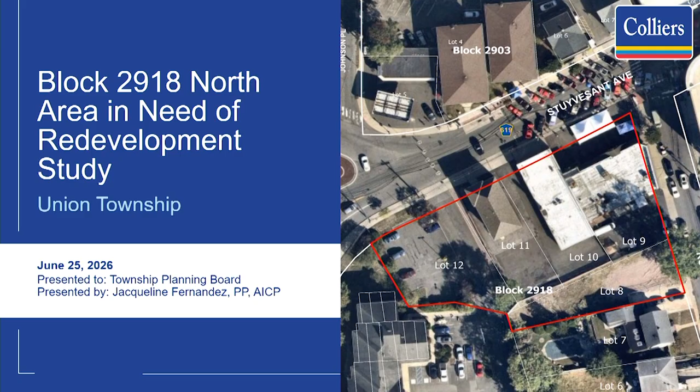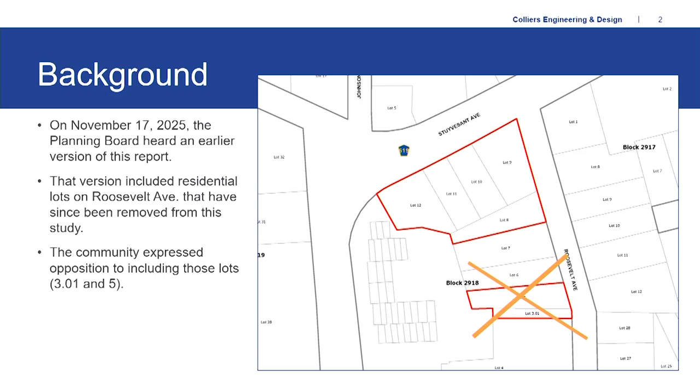This may sound repetitive since this has been before the board in 2025, an earlier version which included 2 residential lots along Roosevelt Avenue. Through community input and deliberation, the governing body has decided to remove those 2 parcels to reduce the study area to 5 total lots with an area of just under 1 acre.

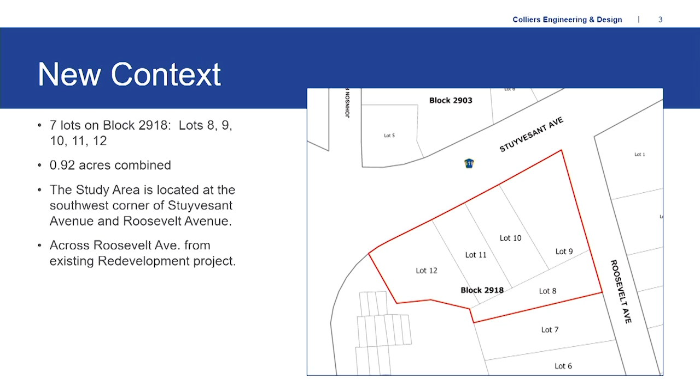We reanalyzed these parcels. They continue to meet the criteria under the Local Redevelopment and Housing Law. This is just going to be a little refresher for the recollection of the board. Essentially, these parcels are within the downtown core and downtown transition zones.

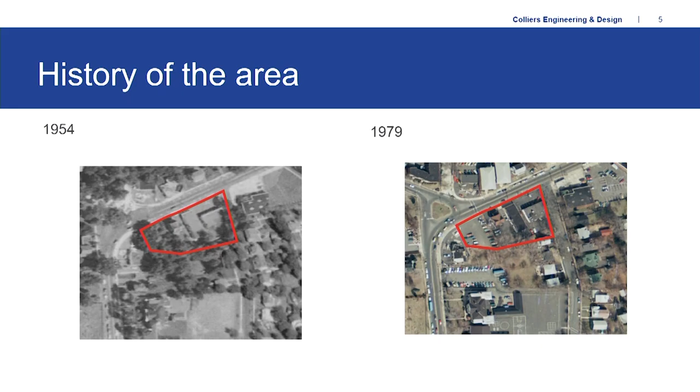A brief history: they've been developed since 1954. A few of the historical imagery shows development all the way up until 2025, which shows the existing present conditions that exist today.

Now, the purpose of this study is to determine whether or not these parcels, under the criteria listed in the Local Redevelopment and Housing Law, meet the criteria to determine if the parcels are an area in need of redevelopment. The criteria used, meaning all these parcels meet 1 or more of these criteria, are as follows: Criteria B, which is the discontinuance of a non-residential building for at least 2 consecutive years, or it has been allowed to fall into a state of disrepair.

Criteria D, in which areas or buildings by reason of dilapidation, obsolete layout, or faulty arrangement and design are a detriment to the safety, health, morals, or welfare of the community. And finally, section 3, in which an area may not have land, buildings, or improvements which meet those criteria, but in total are necessary for an effective redevelopment of the area.

These are just examples of how all 5 parcels meet the criteria just listed. Lot 8 meets Section 3, in which there's no building, no improvements, however it's necessary for the effective redevelopment of the site.

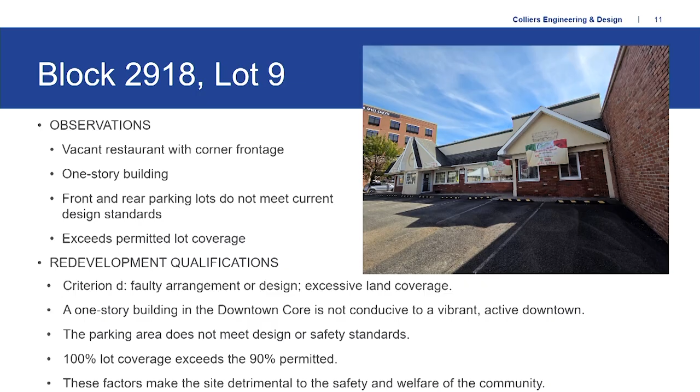Lot 9 falls under Criteria D, in which there's excessive land coverage which does not meet the requirement of the zones. It's vacant, and the current parking does not meet the safety and design standards that exist.

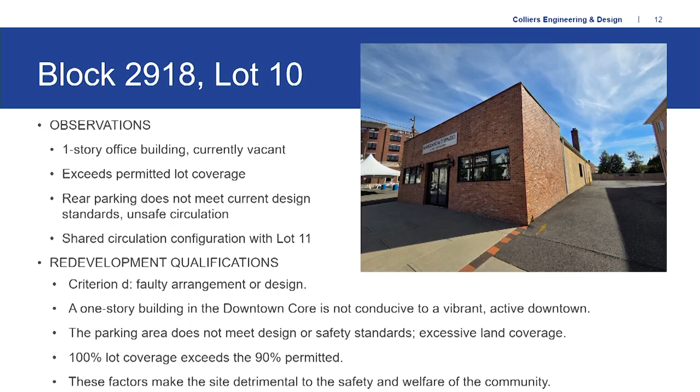Similarly, Lot 10 falls under D, with faulty arrangement and design, unsafe circulation, and again it exceeds the permitted lot coverage for the zone. Lot 11 meets D and B, in which it has been vacant for an excess of 2 years. Similarly, lot coverage exceeds that permitted and does not meet the safety or design standards.

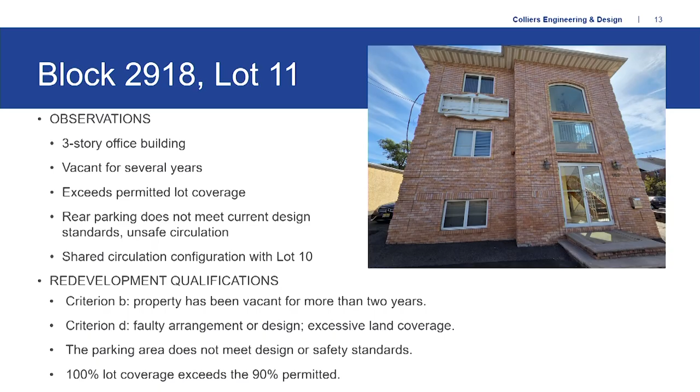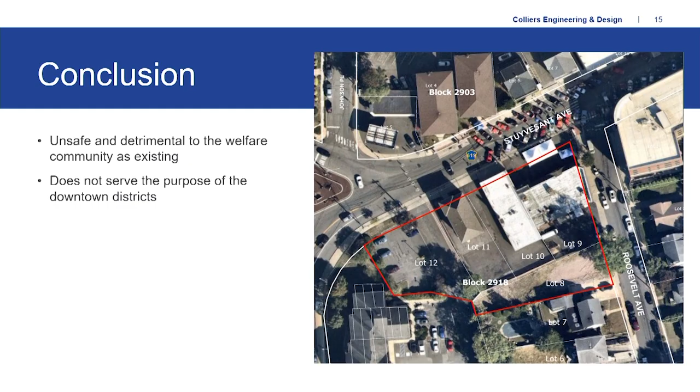And finally, Lot 12, similarly Section 3 - it's just a parking lot, but for effective redevelopment it is necessary. All of these lots meeting those criteria means it's detrimental to the welfare of the community as they exist today. Again, it is in the downtown core and downtown transition zone, and it just does not serve those purposes.

Just to reiterate, you've seen this before, it was approved. This is just an update removing the 2 residential parcels, but the criteria are still met by these lots - they have not changed. Next steps, this is just the first of the process for redevelopment. The next step will be going into zoning and the redevelopment plan, but this is just to designate the lots as they stand, and it is my professional opinion that they do meet the criteria in the Local Redevelopment and Housing Law. So I thank you, and if you have any questions for me, I'm willing to take them.

Questions from the board? Questions from the public? Okay, hearing none.

With that, can I get a motion to concur with the findings of the amended area in need of redevelopment study and refer back to the Township Committee for final adoption? So moved. Moved by Mr. Cohan. Is there a second? Seconded by Ms. Khalid. Roll call, please.

Mr. Alexander? Yes. Mr. Cohan? Yes. Ms. Espinosa? Yes. Mr. Frayne? Yes. Mr. Miller? Yes. Mayor Frazier? Yes. Committeewoman Terrell? Ms. Khan? Ms. Khalid? Chairman Lay? Yes. Thank you.

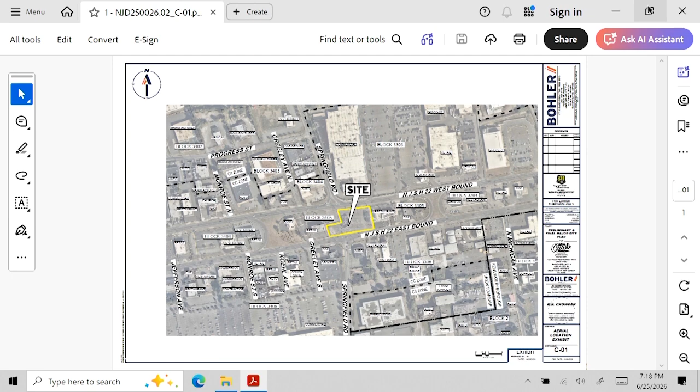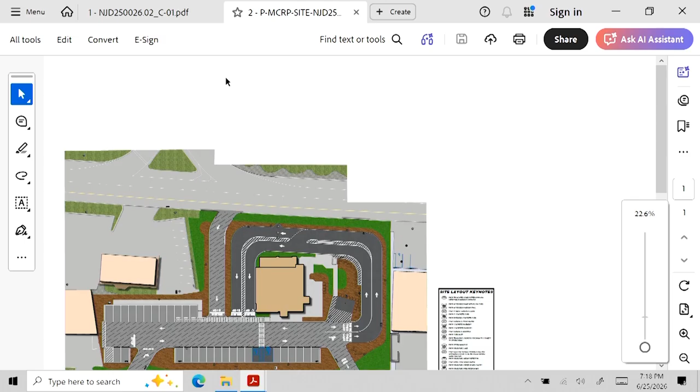So what I'll move to now is the proposed condition, when this loads. And what I can do, Mr. Chairman, is mark this A2, a site plan layout exhibit, also prepared by my office with this evening's date of June 25th, 2026. Very similar for the board's reference—top of A2 is to the north. This is a colorized version of sheet C301 that was submitted with our application package.

I've also colored in and dropped on all the proposed landscaping improvements, so you have a bird's eye view of the full build-out of this Raising Cane's proposal. To reorient you: top of the page is westbound Route 22, bottom of the page, our southerly frontage, is eastbound Route 22.

Our proposal is a 3,500 square foot Raising Cane's restaurant with a dual drive-through operation. You'll see the approximate footprint of the Raising Cane's centered on A2, with a side canopy of covered outdoor seating. As you heard from Attorney Kanarik, there's a total of 98 seats in this restaurant—66 inside, 32 in the open-air but covered outdoor patio area. The building has been positioned to basically eliminate a lot of the existing nonconformities that existed there today with the former Union Diner and that retail shop.

However, due to the fact that we have dual frontages, we aren't able to accommodate the 52.75 feet required from Route 22 to the north—it's approximately 38.1 feet. The ordering canopy, which is really an accessory structure to the Raising Cane's primary use, is only about 9.2 feet from that northerly frontage. But with respect to the side neighbors and the southerly frontage to 22, we're fully in compliance there.

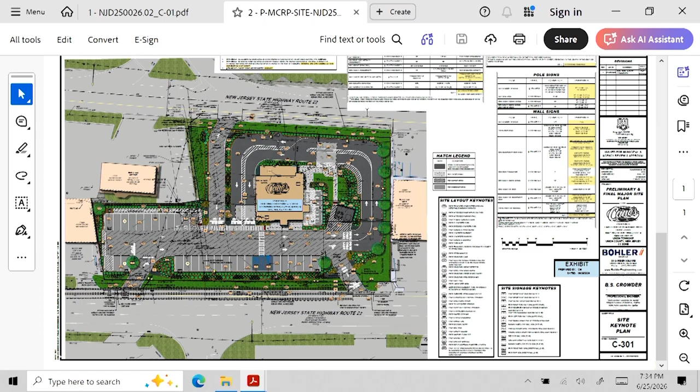So you have one just west of our ingress point from westbound 22, and one in close proximity to our ingress point heading eastbound on US 22. The signs are compliant with setback and height, and they're just over the 50 square foot requirement—50.47. I'll show that as a minor technicality in the detail. We're taking the extreme rectangular height and width of the sign; if you actually trace the Raising Cane's logo and cut that out, it's well below 50 square feet, but a picture will show that better.

So what I'll do next is go to some images first, and then we'll go to the elevations because they look a lot better.

I don't believe I need to mark this—it's an exact copy of something already submitted, Mr. Chairman, but I can for the record. This is in our application package, part of the application. Yes, an exact copy.

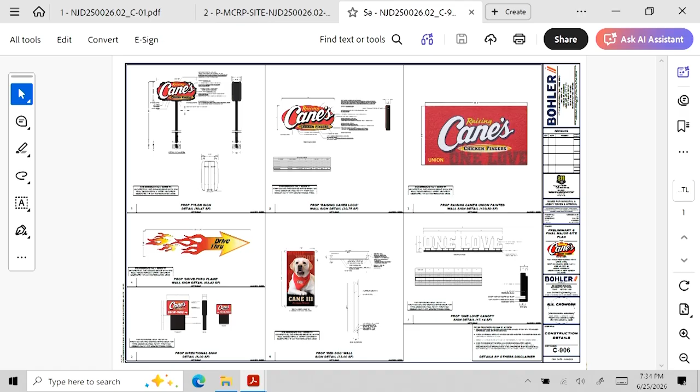Top left detail is the freestanding sign. As you can see, the Raising Cane's sign is 20 feet in height. We're taking the extreme dimensions left to right, top to bottom, which gives the 50.47 figure. But if you actually trace and carve around this, we're actually below the 50 square feet, so I wanted to confirm that minor piece.

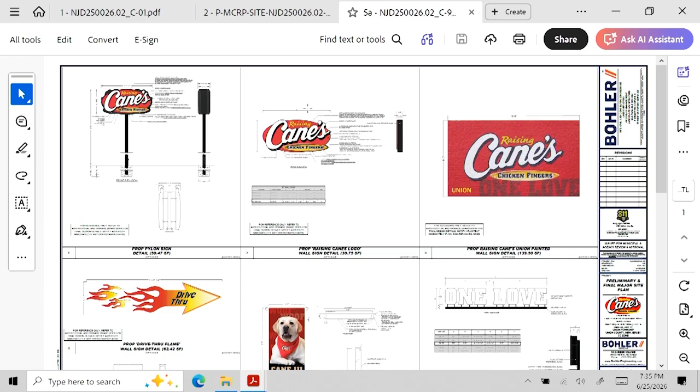Raising Cane's logo—as we get into the building signs, we're permitted to have 2 since we have 2 frontages, but we technically have 7. I'll get into the elevations. A couple of these signs are actually painted murals on the building; they bring in a hired artist to paint these directly on the facade of the Raising Cane's restaurant. We're treating all of these as signs, whether architectural features or painted murals, as part of the 7 around these 4 elevations.

When we look at the elevations, each one complies from an area perspective, with the exception of the southerly elevation, which I'll show shortly, largely because of this Raising Cane's mural. So instead of staying on this, I'll go right to the elevations.

I think this tells a better story. I won't mark this either—it was also submitted with the application, just for clarity.

So the top elevation would be your front entry elevation, the southerly elevation of the Raising Cane's restaurant. If I was traveling eastbound on 22 and looked north into the site, this would be my main principal elevation of the building.

You'll see a Raising Cane's logo that's 30.75 square feet, common across all four elevations of the building. One of the elements is actually painted, which we call the One Love mural. One Love in Cane's terminology is the chicken finger meal, part of their branding in the industry.

As you'll see in this detail, this is actually painted—139.5 square feet on this facade, which is the facade that exceeds the area. They bring in a locational element here; it says Union on it, among all the other restaurants open in the United States. They like to bring the local town into the mural. It's got a social media presence—you have a lot of individuals who go restaurant to restaurant taking pictures of the murals at each Raising Cane's they've been to.

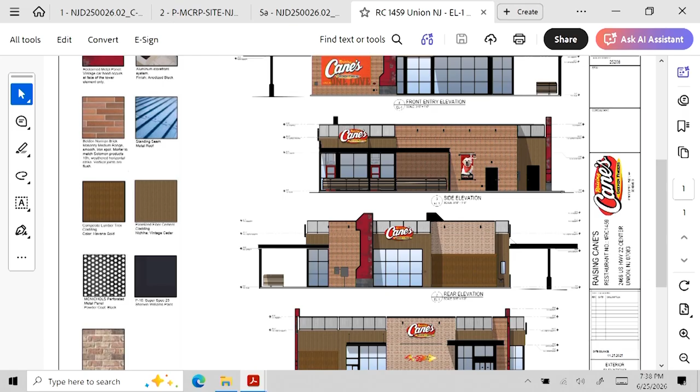As we move to the side, this first side elevation would be your easterly elevation. You can see the breakdown of this outdoor patio seating area, with the Raising Cane's logo at 30.75 square feet immediately above it, and then what we call the Red Dog mural. It's an aluminum substrate that hangs on what look like two shower rods, with some accent lighting up onto that sign.

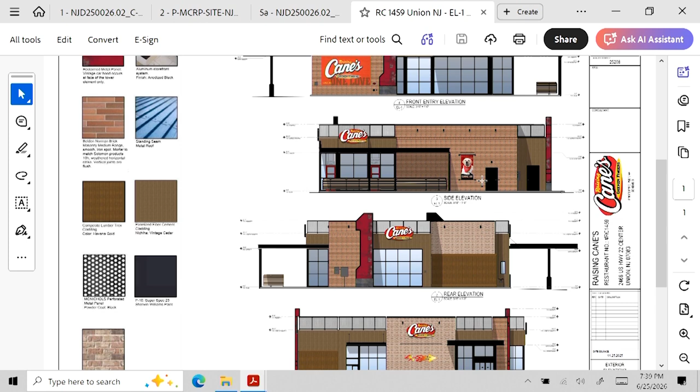Cane, for reference, is Todd Graves—the CEO president's dog. He's up to Cane 3. It's a Labrador Retriever, which is why you see a Labrador Retriever with a Raising Cane's bandana around its neck.

As you move to the rear elevation, your rear elevation is your westerly elevation of the site, where again you have the architectural tower incorporated into the design, and the same Raising Cane's logo as on the other three elevations.

Then at the drive-through, your drive-through will be the northerly elevation. This is what you'd see if you were westbound on 22, passing the site and looking south. You can see more detail of your pay window, and as you continue forward, your pickup window. This also converts to a sliding door during peak hours when crew may be coming in and out with meals from the kitchen to the window.

Also on this elevation is another painted element, called the drive-through flame—just an architectural painted feature on that elevation. So all in all, that captures the sign package of the 7 versus the 2.

I talked about the variances on the area. Technically, these signs need to be 10 feet above the ground; however, given the pedestrian nature, outdoor seating, and entrances on multiple sides, these are as low as 3 feet 7 inches from the ground surface. Also, the max vertical dimension of a secondary sign can't exceed 5 feet in height—this Red Dog mural is 8 feet, and the One Love painted mural is 9 feet in total height on that principal elevation of the building.

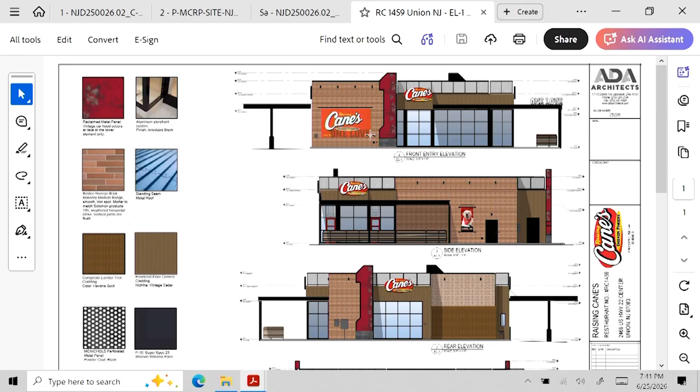Just a few follow-ups, Mr. Chairman—forgive me if you mentioned this, but what about the number of employees and shifts? Yeah, so a typical shift is 8 to 12.

Your max employee shift is 12 to 15, and that's a combination of hourly and salary.

Cane's typically hires locally. If approved, this would be the second location in Union County. There's one under construction in Linden, New Jersey right now, but the closest open location is probably Edison, New Jersey, as they're slowly making their way up. They have an open location in Fairfield, but Edison would be closer.

And the total locations overall throughout the country? I always ask this before I get in front of the board. It's 1,024 as of yesterday, and counting, in the United States, and counting fast.

I have nothing further, Mr. Chair. The only other item is if the board engineer wants to go through his report. I'll just note for the record, I've gone through the report and we have no issues complying with anything within it. Okay, thank you.

Questions from the board? I have a question. Just make sure your mic is on. Yep.

Just one question. If you go inside that restaurant to buy, how do you get out? Do you have to go through the drive-through and make the line to get out, or is there a through lane, so if you just wanted to park and go in?

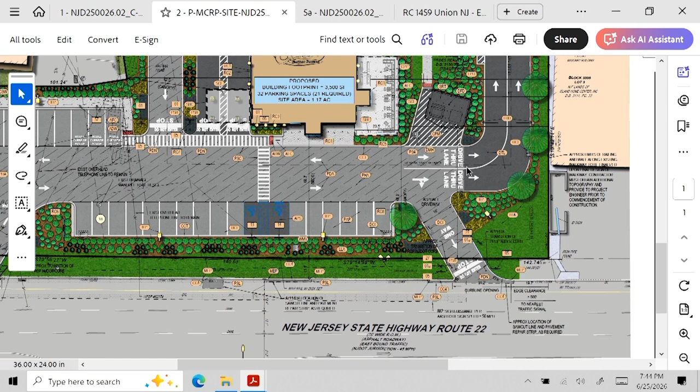What about overflow from the drive-through? Right now we've designed it to have a capacity of 30 cars, which, from our study locations - honeymoon aside, right, when a restaurant opens for its grand opening - Cane's likes to work with local police on a traffic control plan if it were to get outside the 30. But 30 is a pretty good number relative to the locations that have been studied, which suggest about 15.

So we wouldn't have any issues with an emergency vehicle going through, or any emergencies coming in and out through the drive-through? No, we've completed fire circulation templates for everything through here. And we did receive their letter - there's a few comments more specific to the building itself, but that was adequate.

Okay, thank you. I have a question. So let's say you're in the drive-through lane, you pass the exit, and you're a little further up, and you decide you no longer want chicken. There is no passing lane.

I would say during most business hours, it's only going to operate as a single-lane drive-through operation, so if you wanted to bail out, you would have the outer lane to get through. But let's say the two lanes are full and are being used - well, one lane is closed during normal business hours. It just functions as a near-side drive-through operation only, so that whole outer lane remains open.

So when does that second lane open for drive-through? Once they notice that the queuing from the ordering canopy is starting to get back to where, on this plan, the trash enclosure drive-through starts, they'll open the second lane as a second lane to order. But after you order, it merges back to one lane, so this outer lane around the balance of this area is free and clear - there are no cars there. The only time they use that is during a peak lunch or dinner rush, where you might see both lanes operating all the way through.

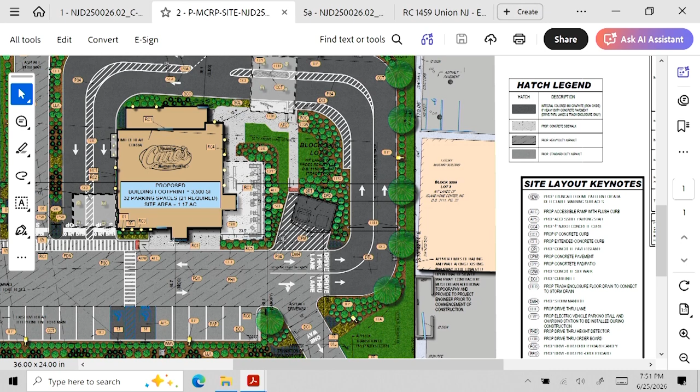Ms. Keller: But if we have people waiting in the drive-through queue? Response: The queue is not going to come out past the dark gray area shown here - the 30 cars are entirely contained in that dark gray area. We're not anticipating any cars to come back beyond that, which would interrupt typical parking flow for someone wanting to park and go in and order. Ms. Keller: Okay, but I still have the two lanes letting in from the west side, so there's still some type of bottleneck there.

I'm not sure I follow, but if you could describe it a little more for me. Because I'm the EV, I have only one way out, and that's all the way to the bottom right. So for me to get there, I mean, I'm talking about your busy season, right?

Because my daughter follows you and she goes to different Cane's, so we've been to the one in Burlington County and things like that. So yes, I know the signage and all that.

That being said, I know how packed it can get. And if I'm the EV and I have people coming in, because you're going to get that, especially in that honeymoon period, and Union 22, we have a lot of people coming in and a lot of flow, which is great. But they're coming in from both sides, from the east and the west. My EV spot is all the way over there. It just seems a little rough.

A couple things we've done, and I think I'm maybe following you a little bit more at this point. We did provide a striped space down here in the bottom, so in the event that someone comes in off of 22 and decides to turn right to find a parking space on the north and they're all taken.

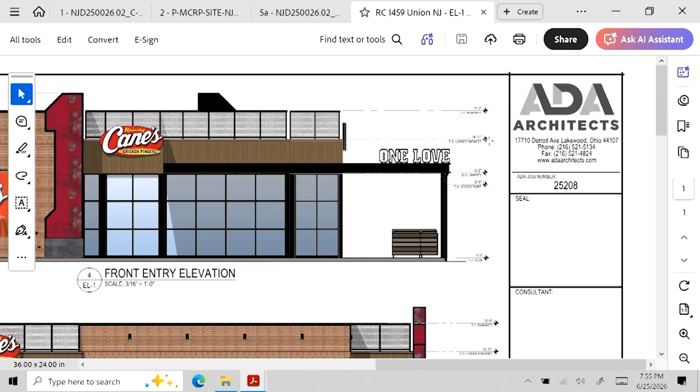I just had one quick question. You touched base on the 10 feet height on the enclosure. Can you explain again why 10 feet and why above what's specified in the ordinance? So there are 8 cubic yard receptacles in there, but there's also a compactor, and just to appropriately screen that, they bring the fence line up to 10 feet.

Okay, so you've got full screening, all 4 sides, you can't see through it, and it's really only opened for the haulers' use. And then just another quick question: wherever you have stop signs or stop marks and do not enters, are there also signs that accompany them? Yes, yes. Okay, so there's all these little tags on here. They're tagging different pedestrian crossing signs, advance warning signs, but all the pavement markings are accommodated with a sign as well. Got it. And then just one last question.

When the nearest drive-through lane is filled to capacity, is there an indicator to utilize the second drive-through, like a worker navigating traffic, or some other indicator, signage, or lighting? It's through a crew member monitoring the flow and how much it's backing up. It becomes customary as you approach lunch and dinner rush to activate that second lane.

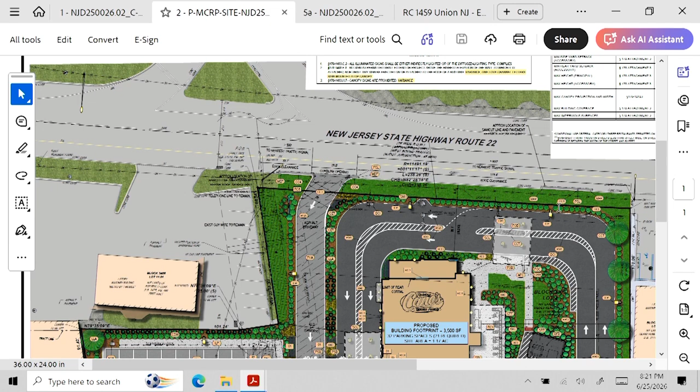We did look into considerations for how we could have a driveway exiting onto westbound Route 22, but we couldn't get the design to work out, so we ultimately had to stick to just ingress only, because our site frontage is all on the eastern side of Springfield Road. If we proposed any kind of egress there, people would potentially cut over and use that, which was DOT's biggest concern. That's why there's only an ingress on the northern side of the property, and the southern side had the same issue. Today the driveways are egress on the western side and ingress on the eastern side, so we flipped them so when exiting you have no potential of weaving over lanes of traffic to get onto Springfield Road.

So that was ultimately the reason we ended up with this design, because of that weaving and concern from the DOT. Now, the follow-up is that once you make the exit onto eastbound, there is a left side U-turn.

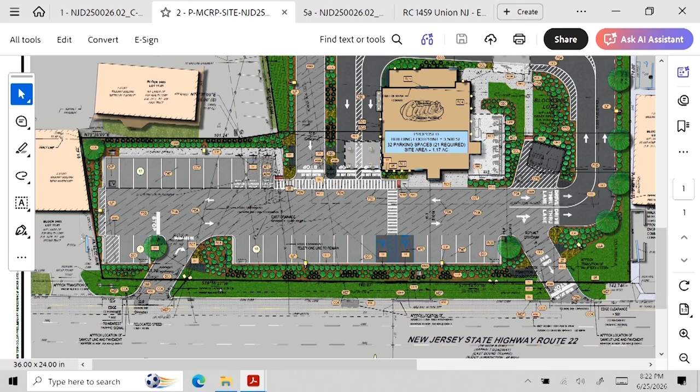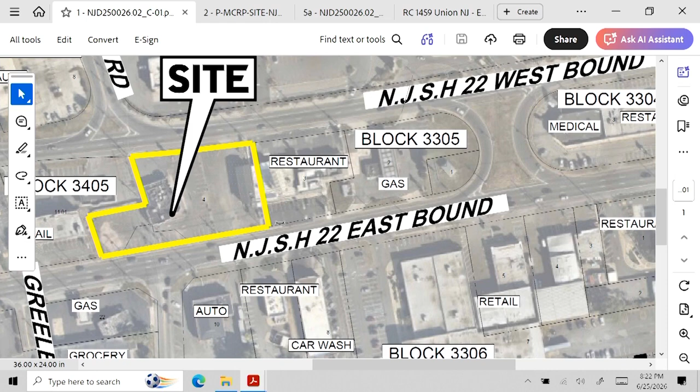There's a U-turn, yeah. Just for the record, how far away is that from the exit from the property? I can measure that really quick on my phone. You don't need to be precise to the inch. Top left PDF. Is it already scaled? I'll just estimate it then. It's pretty much like one site frontage over, so it's about 300 feet to the east, maybe 350.

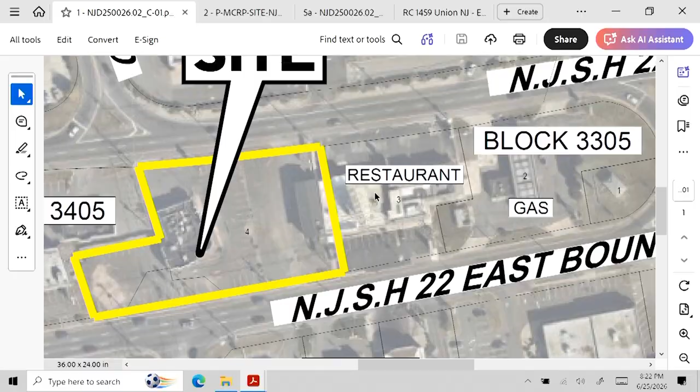In the other direction it's a little further down, but the only reason you wouldn't need that is because if you're traveling westbound, you can just enter the site directly from westbound 22. Right, but if someone is interested in entering the restaurant and they miss the entrance, they would have to travel a considerable distance to come back. That's correct, yeah.

My other follow-up question is that I know we talked about the intensity of traffic on 22, and I know Mr. Cohan referenced sometimes the backing up on the westbound end. From your analysis, do you find that eastbound 22 can have that same intensity of backup compared to westbound, or is that less?

I found that they were both pretty comparable. It had a good amount of queuing, especially during the PM peak hour is when we noticed it the most. But basically the bottom line from our analysis is when you compare the future conditions with the site the way it is versus what we're proposing, the queues and vehicle delays would be generally comparable in both conditions.

Ms. Cowlett? I'm looking at where the garbage would be taken out and how it would be handled. I know it was mentioned that deliveries would be done before the store opened by an hour or two. Is garbage scheduled like that as well? Because if not, I can see that causing a problem, especially where the garbage cans are located and the exit.

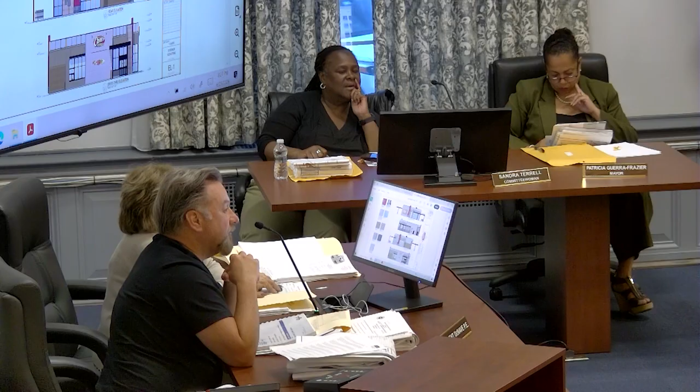If we're looking to reduce an additional one, the next one that would go would be the red dog mural of Cane's. How about, I think the one that's probably least useful would be the flaming sign. I just don't know that when you're in the queue and working around the building that would be necessary. I don't know who we're looking at over here.

We're going to do a quick sidebar. Oh yeah, no, it's all right. I just didn't know.

I almost feel bad taking out the dog. Poor thing, it's kind of cute, you know?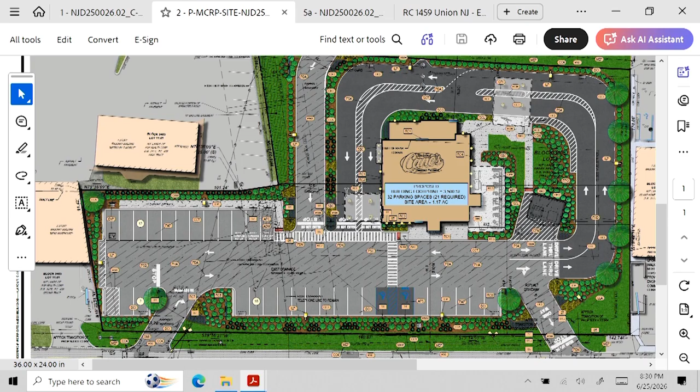That principal facade from 22 is this top elevation here. Your Cane's logo—we're going to remove the channel letters—and then our One Love. The 22 elevation is actually... where's our 22 elevation? Rear, third one, yes. Your westbound 22 elevation is this third elevation. So all you have is the Cane's logo as you're coming by, and the big one, the architectural element, yes.

And then on the eastbound side, it would be... that's your top elevation here. This is what you would see. This is your principal elevation, but we're going to remove the channel letters. You would just have the Raising Cane's logo, and then at your main building entry point, right under the Cane's logo, is where they have the One Love mural, which is the social media sign and brings in a little bit of Union onto it—that's that painted element.

But you wouldn't be removing that one on that side, just on the other side? Where your cursor is right now. We're not removing the One Love, yeah, the channel letters, not the other one. Yes, this is kind of like a building element into the design of the facade. No, not.

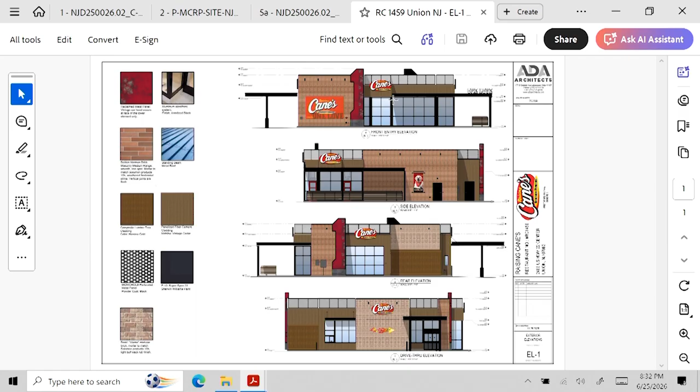Okay, so with that, let me just quickly ask the board if there's any further concerns after the two modifications. I think we're good. Thank you. All right, thank you. Thank you, Chairman.

Appreciate it. Last but not least, we have Matt Flynn from John McDonough Associates to present planning testimony for this evening.

Where am I looking up? Copious notes. Please raise your right hand. Please state your full name and spell it for the record. Matthew Flynn, F-L-Y-N-N. Do you swear the testimony you'll give today will be the truth, the whole truth, and nothing but the truth? I do.

Mr. Flynn, will you please provide the board with the benefit of your qualifications and experience for the record? Yes, my education comes from Rutgers. I have my master's degree in planning and public policy, a professional planner's license in the state, as well as my national licensure, the AICP license. Both are in good standing. I've testified before over 100 boards across the state, as well as the zoning board; however, I think this is my first time before the planning board. And your license is in good standing, correct?

That's correct. The board stipulates. You may proceed. Thank you. Let me just see if I can.

Our planner presented a photo exhibit using drones for the surrounding area, so that's what he's pulling up in case anybody was wondering. You didn't rename it, did you? I guess it didn't make its way on here. Oh, I'm in the wrong spot.

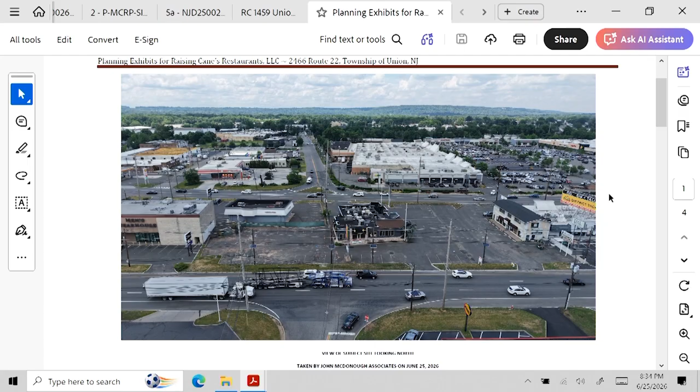So as we heard, right now we're talking about a property that is almost 100% impervious. The difference between what we have here and all of that green we just saw in our landscaping plan and colorized site plan is pretty stark. You have a whole lot of pavement here, and we're replacing that with almost a 20% reduction in impervious surfaces. The other thing to note on page 1 is that you have a building that is almost right on that side property line, whereas the proposed building, as we just saw in our site plan, is more centrally located on the subject property.

Just going down to sheet 2 here, now we're looking west. Again, we're bringing that building away from that side property line, more centrally located. We're actually proposing less impervious coverage, less building coverage, less building height, so really an overall less massing than what we even have today.

And then just looking south here, we're looking at the other side. Now we have that 0.2 foot setback condition existing on the right side of this image. Again, bringing that building closer to the center of the property. And then finally, just completing that rotation around the property.

Now we're looking east. So if the board has any specific questions, I can come back to this exhibit at any time. So basically, the board has heard at this point the massing, the form, the overall circulation, how the property is going to be used.

From the planning standpoint, we are talking about a permitted conditional use, so that does make the planning testimony pretty simple. The only condition for this use is that it is required to have frontage along Route 22, and of course, that's what we have here.

So we do require some variance relief, just C variances, no D variances. I would remind the board that just because something is a variance doesn't necessarily mean that it's inappropriate. It gives the board the opportunity to judge whether it is appropriate given the specific property and the specific use we're requesting approval for this evening.

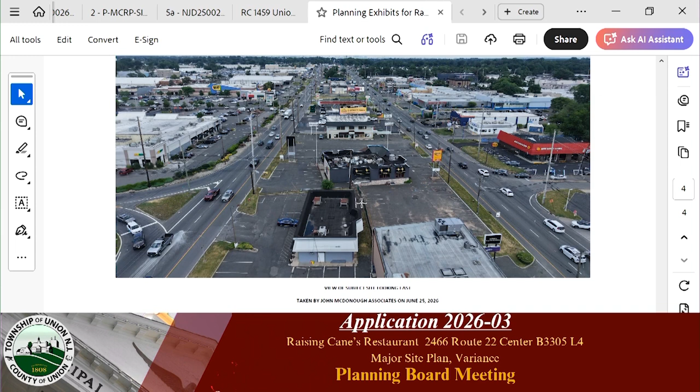So really, all said, I think we can look to the C2 balancing test, which is basically looking at the benefits of the application and whether they outweigh any potential detriments. In order to look at the benefits, we look to the municipal land use law, which sets forth the purposes of zoning. Here, I think we can look to purpose A, promotion of the general welfare.

The project overall, of course, is for a drive-through, which benefits people that might be driving during inclement weather, people driving with a car full of kids, people that might be feeling sick or have mobility issues. This is a land use that serves those segments of the population. It also reduces several non-conforming conditions, which I'll get into in a second, along with a substantial reduction in impervious surface and a substantial increase in landscaping. And then we heard we're reducing the number of driveways associated with this project.

So all of that goes towards promotion of the general welfare in terms of safety and the overall benefits of the use itself. Purpose G is variety of uses in appropriate locations. Again, this is a conditional use. The only condition is that it's on Route 22, so it's a location-specific requirement, and we meet that, of course.

Purpose I deals with desirable aesthetics. Here, again, I'll talk about the substantial new landscaping and the more centrally located building placement, substantially improving that side setback condition for better relationship with our neighbors.

And then finally, purpose M is efficient land use. I would say we're substantially compliant from a bulk standpoint, and I'll get to that in a moment, but really this doesn't constitute overdevelopment. A lot of the relief that we're seeking is really design-oriented, not the overall massing or the actual development intensity of the property.

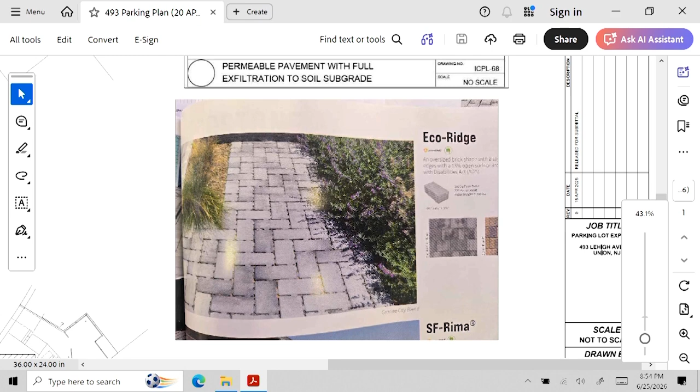We're kind of at max capacity with parking spots, so we would like to propose a parking lot expansion. I have some aerial photos I'll show you guys, but we're going to have this permeable parking lot that will have good drainage, and then on top of that, there are these neighbors across the street.

They're residential neighbors, so we want to have consideration for the aesthetics of the neighborhood. So we are proposing to put up a row of evergreen trees right here, on the side of the parking lot.

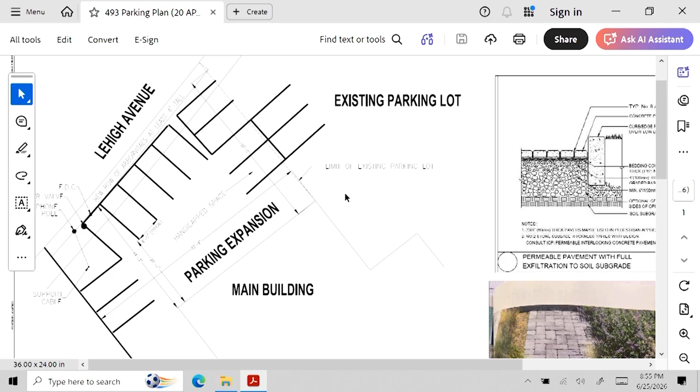And we created these drawings. We have 4 full-time professional engineers who created these drawings, and we used our previous land survey to create them. We really need to grow, and I think having more people will help us grow. So I could show you some aerial photos.

So, Mr. Savino, before you show the aerial, can you explain a little more about your business? You said you've been in the area since 1997. Could you explain your interactions with the community?

Sure. So we do fire protection and life safety systems. My dad opened the business in 1984 in Roselle Park, and we have a great relationship with Union. Earlier this year, the fire department came to our shop and asked us to make an assembly that could test fire hoses. They said they'd be willing to pay, but we donated it, and we have a lot of customers in Union. We do fire alarms, like the smoke detectors in the ceiling, and fire sprinklers. We protect assets and lives, and we're very passionate about our business. It is family owned and operated - I work there with my father every day and my brother. We're just trying to grow the business.

What else do you think it should get? For right now, we're good.

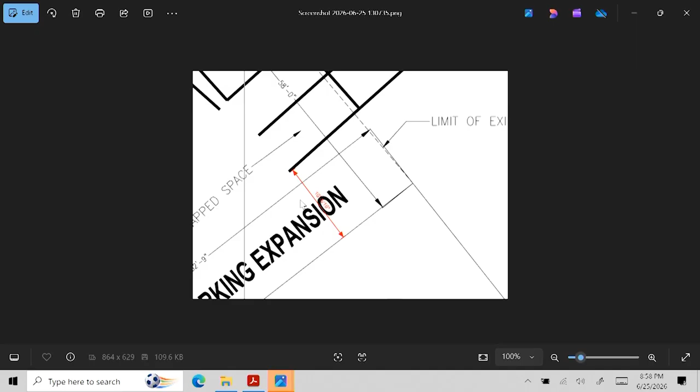Just for clarification on that one - when you say an entrance to the parking lot, do you mean an entrance to the parking lot from the street or from the other side of your property? That is from - sorry, I'm all over the place. So that entrance will be, let's pull it up. So this entrance right here is 16 feet wide, and this is the existing parking lot. We're not going to create any new entrances to the street or get rid of or destroy the curb.

So I think we're going to net 10 parking spots. And we have another office in Kenilworth, so we do have people from the Kenilworth office. They like to visit the Union office, and they kind of have nowhere to park. We don't want to park in the residential area.

Okay, right? All right. Yeah. Okay, let's see what else I have here.

Trevor, if you don't mind me going through a few things - I don't mean to interrupt, but for the benefit of the board, and I know that you've been working with the engineering department trying to get these plans together, and we appreciate trying to do it on a bit of a budget. So I just want to go through a few things for the benefit of the board, to put on the record, right?

You're going to be taking out grass and putting in these pervious pavers. The pervious pavers essentially continue to be a pervious surface, so even though you're taking up the grass, there's no need for stormwater retention, because they're placed on a bed of stone. The pavers allow water to flow through them and into that stone, which creates the storage that would normally be provided by a seepage pit or a tank. So you're still maintaining that stormwater, correct? Correct, there's no change to the existing stormwater management or flow from the site as a result of this proposed change.

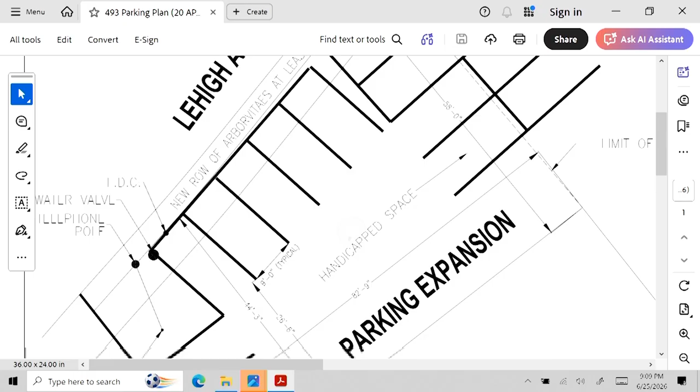I think it might actually be more accessible, they'll be able to put a fire truck right in front of the building. The FDC is not being moved? No, we're not touching that, that's our business. We're not going to touch this, there's a little utility corner here. I'm going to pull up the drawings again, we're going to leave that untouched. Will you agree to a condition that if you need to protect that with bollards or something else, to make sure nobody backs into that fire connection? Yeah, of course. You'll put that in there? Definitely.

Any further questions from the board?

Just had one quick question. On the bottom right of the screen here, you show an example of the pervious paver.

My question is, is that the exact style, or maybe another way to phrase my question is...

Does that style permit the ability for clear striping of the parking spaces to be identified, so that people are parking within each space compliantly?

So your question is, is this the exact stone we'll be using? Yes, we are. This is actually the picture we took from the book that we'll be using, and then I believe we're just going to be painting right on top of these stone pavers, so that each space is identifiable.

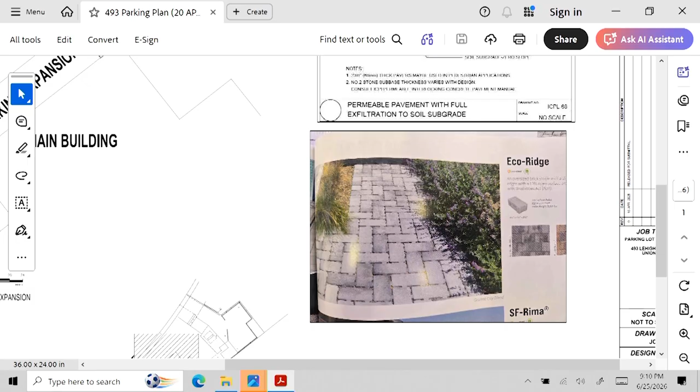Yeah, okay, we'll be painting on top of it, and then we'll have crushed stone underneath, so they'll have proper drainage.

Two questions. How many cars will fit in the new paved area? We're going to net about 10 more spots. Okay, so currently there's space for 13.

There's 13 spaces shown on this. So 13 on the parking lot on the side? In the new design, it's 13 spaces.

But because of the way it's being designed, there's a loss of 2 to 3 parking spaces out of what currently exists. So it's a net of about 10, but 13 parking spaces are shown on this plan.

So if you have all those cars parked in the front, how do you get to the entrance? Oh, the entrance is, our front door is right here.

So it's clear - there is no walkway anymore?

No, we'll keep the walkway, but it's just going to be pretty much an open paved area. This will be open - this is the main building. We'll have the front door right here. But it wouldn't be open because there's people parked there.

No one's going to be parked there. Oh, got it. Okay, okay.

The front, where my cursor is, is where the front door is going to be. Oh, okay, okay.

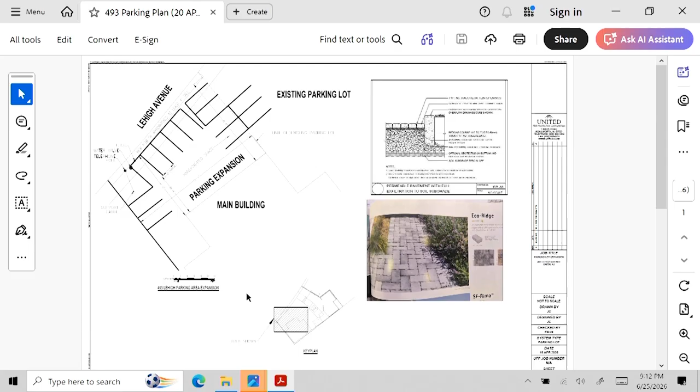Sorry. Yeah, what's wrong? No, she has it. Okay, so, Trevor.

Okay, got it. If there's a need, if field conditions dictate that we've got to move this away from the building a little bit, just to give some safety space between the walkway and the driveway, are you okay putting a fence in instead of shrubs in the front?

Absolutely. We were doing shrubs just because I think it's the nicest thing for the neighbors across the street. I think I have another picture - their homes are across the street, and they have made some complaints to us in the past to clean up the yard.

We have cleaned it up, and there's a fence right here. We did a screening and stuff, so we want to be as considerate as possible to our neighbors. But we could definitely do a chain link fence with some screening in there too - we just want to make the place nice for people.

Yeah, I think maybe a combination where you have some lower lying, tighter shrubs, because I am concerned that either you're going to be pushing out into the street, or into the town's property for sure. Totally. All right, I'm looking at your neighbor's fence next door, and, yeah, I wouldn't come up with that style.

Do you have that picture that shows their fence? Yeah, the other picture I had? Yeah, I'll pull that up again.

Mr. Denave, just for my clarification, you're talking about putting a fence along Lehigh Avenue, not near the building, correct? That's correct. Yeah, okay, so let's see.